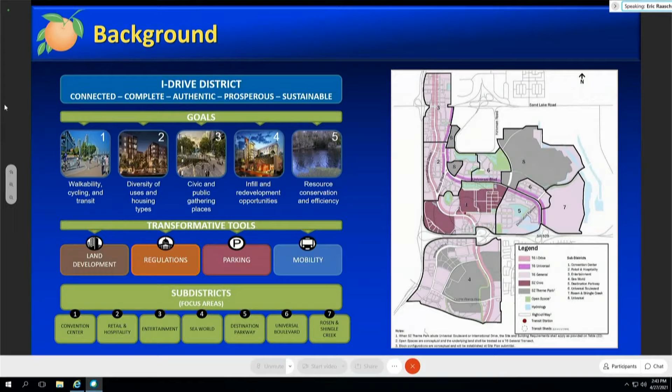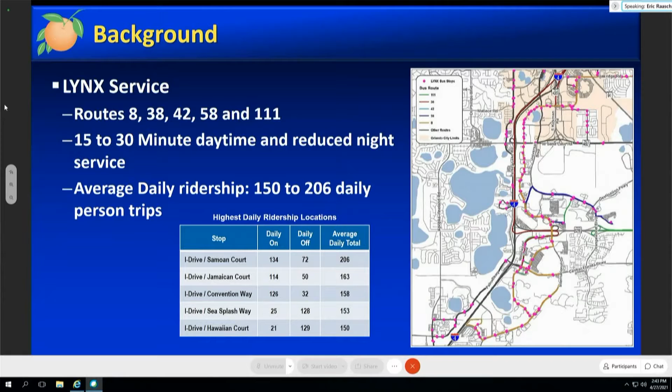There's a very strong linkage out in the Idrive district between land use and transportation, and you can see by the map LYNX serves a number of stops along Idrive, Universal Boulevard, and other road corridors, providing service to those land uses. There's 15 to 30-minute headways and fairly decent ridership.

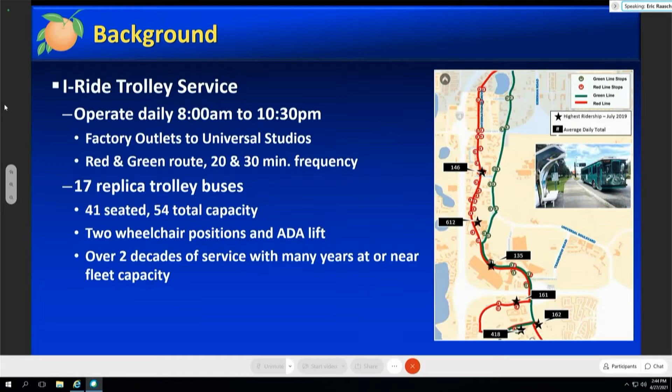Also in the district is the I-Ride Trolley service. It's had over two decades of service, and many of those years they were at or near capacity. The service runs 20, 30-minute headways for a good portion of the day and evening.

We also wanted to make sure that as we went through the study, we coordinated with the Convention Center Master Plan and made sure that their future projected circulators interfaced well with the system that we envisioned.

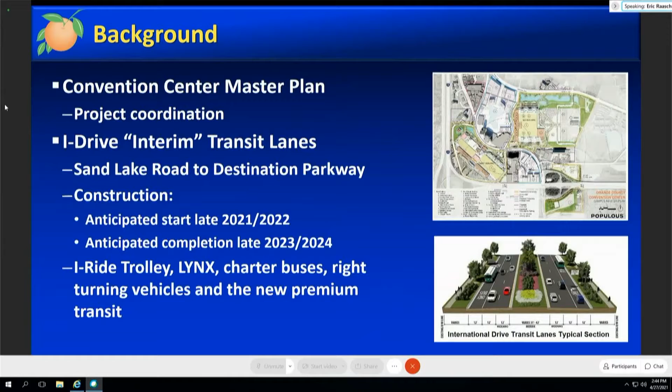Also an important project in the district is the Idrive Interim transit lanes. These are lanes that will be constructed later this year, and they're going to facilitate the I-Ride Trolley, LYNX, charter buses, right-turning vehicles, and premium transit service if we move forward with that.

This project also appears on Metro Plan's prioritized project list. You've also been briefed on the CRA project list recently—this project is on that. It's categorized as premium transit, and it provides higher comfort, capacity, speed, and frequency than typical bus operations.

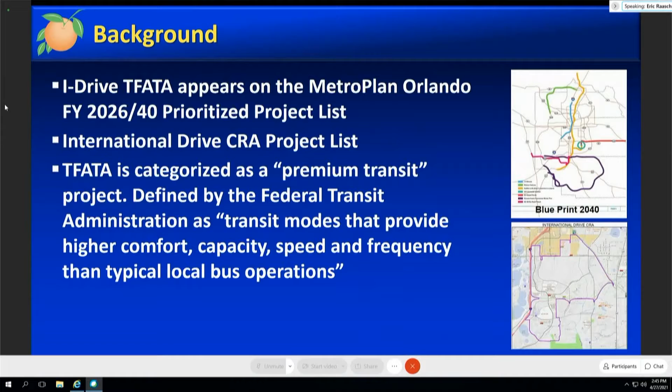Transportation planning has brought many road widening studies to this board, focused on roadway design criteria primarily aimed at creating additional space in the right-of-way for capacity, where we looked at alternatives analysis and access management, created a typical section, and attached costs to it.

Conversely, when we're talking about transit studies, that evaluation of alternative analysis focuses on operation plans for transit vehicles and creates a program for the projected ridership, attaching costs for O&M and capital. In this case, federal and state funding come into play because there are programs available to help with these types of projects.

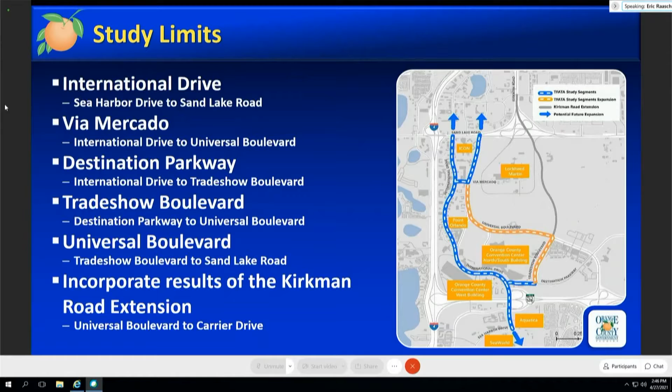In terms of the analysis that we conducted, these are the roadways that we evaluated for premium transit service.

In any case, the recommendations would support multimodal connectivity, make sure that we're serving all of the travel markets in that district, as well as create a sustainable and competitive system to make sure that we're competing with the rest of the globe in a cost-effective manner.

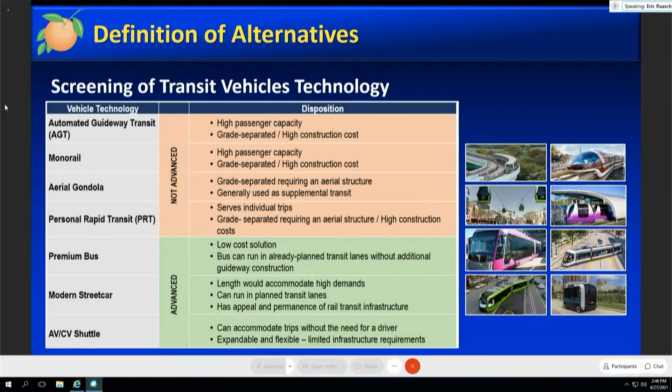As we dove into the various modes of technology for vehicles, we looked at a wide variety. Some advanced for particular criteria reasons, and others did not. For those that did advance, there was a high focus on passenger capacity, flexibility, and whether they were proven modes of transportation established around the country.

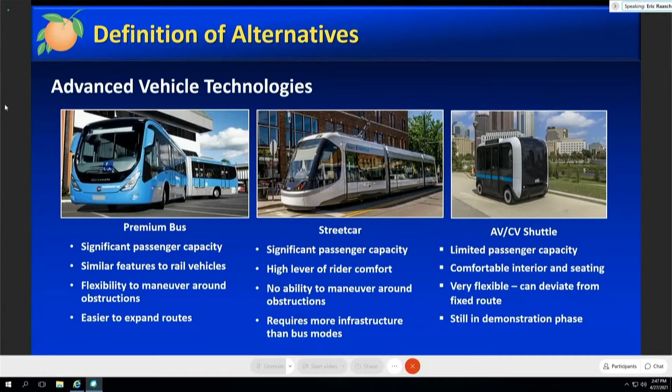As you can see, premium bus, streetcar, and automated and connected vehicle shuttles were the three that came forward. As we put them through the evaluation criteria, the premium bus came forward with lower capital costs, high capacity, higher flexibility, and of course a proven track record.

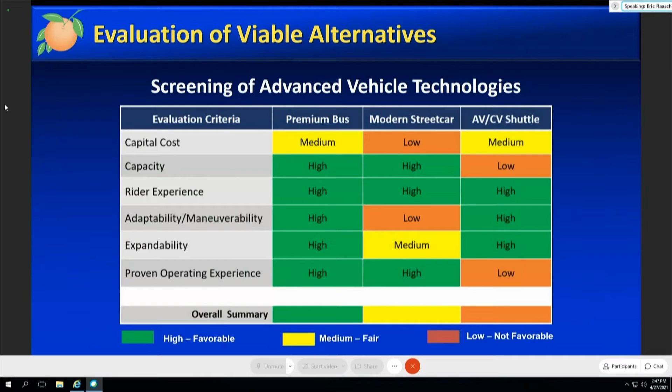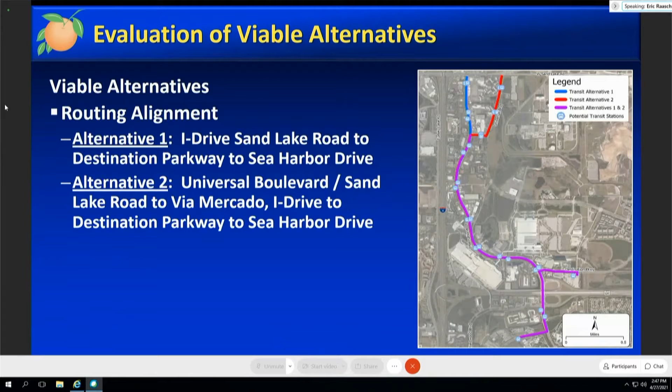We also looked at a number of alternative alignments for the system. Basically, we're looking from SeaWorld to the south all the way up to Sand Lake Road as a starter corridor for premium transit. The alternatives were up on the very north end between Universal Boulevard and International Drive itself. This system needed to be evaluated for whether it's going to be curbside running or median running, and based on a number of key factors, we evaluated that as well.

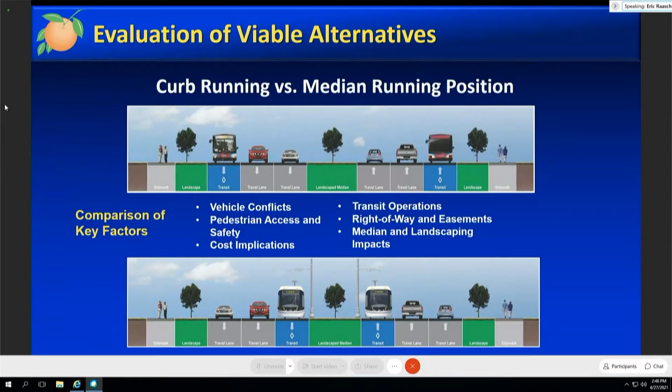In terms of the recommendations, the premium bus came in first. The alignment to stay on International Drive was heavily driven by the availability of parking at the north end.

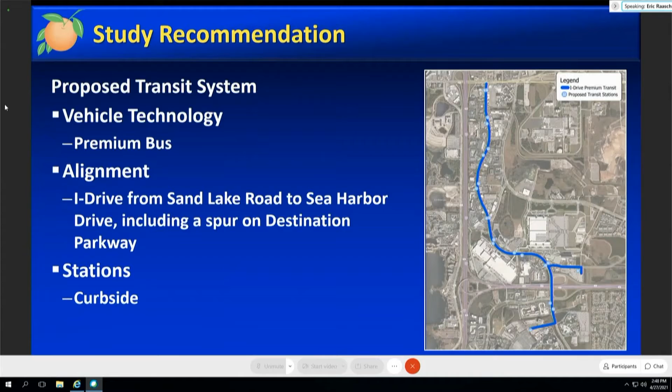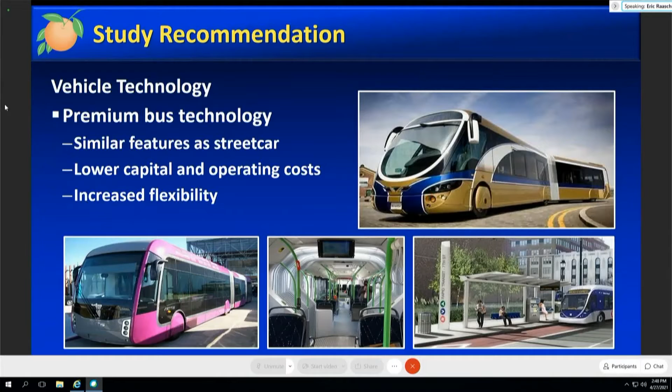The route goes from SeaWorld on Sea Harbor all the way up to Sand Lake Road, and that's going to be a curbside running system. Much of the technology for premium bus is very similar to streetcars, with all the amenities available, and it offered lower capital costs and greater flexibility.

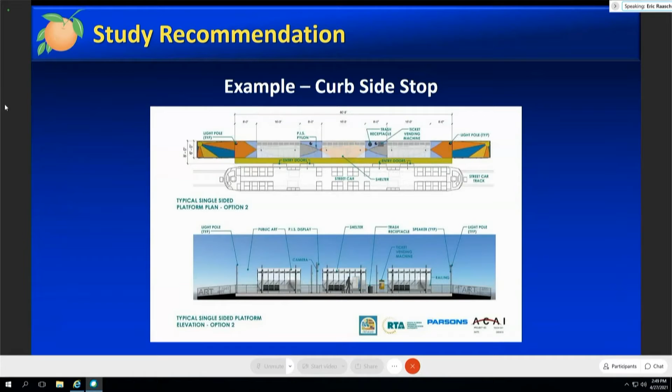We also had to look at the type of stations we were going to provide for this system. Seeing that a premium bus with an articulated feature needed a pretty good size station that offered level boarding, so that whether you're traveling with a stroller, a wheelchair, or a bicycle, you could easily get on and off that system. We also made sure the stops were spaced appropriately to facilitate a 10-minute headway, spaced approximately a quarter mile apart, so you're no more than 700 feet from the next stop.

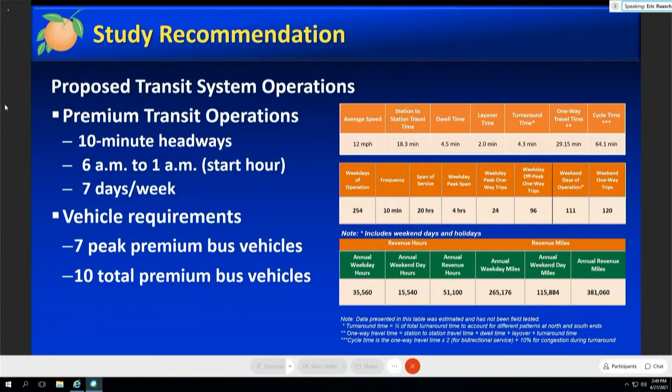With a 10-minute headway, if you just missed that bus, there'll be another one right behind it. We built an operating plan based on those ideas: a 10-minute headway, with expanded service all the way to 1 in the morning, 7 days a week. We built a fleet of vehicles to service that target headway, as well as a few vehicles for maintenance.

For capital and operating costs, we estimated that the starter capital cost would be $83 million. $23 million of that cost is for the transit lanes that are going to start construction later this year. When you look at operations and maintenance estimates, this system is estimated at $4.8 million annually. When you take the estimated ridership and the fare we anticipate, you're down to $3.4 million per year.

Transit hubs are important as well. They offer relief for the drivers of the system, and they also provide regional connectivity to future systems that may come to the corridor. We looked at a number of locations. Orange County already owns and maintains the #1 location, which is also the site for the LYNX SuperStop.

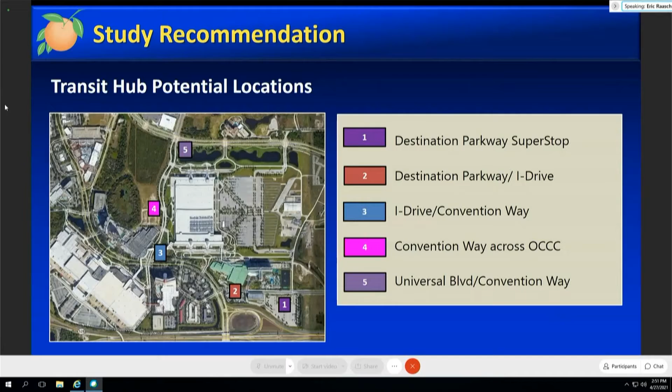In terms of funding, as I mentioned before, state and federal funding is available under a number of programs. It's a competitive program we'd be looking at to help finance this project. We're looking at a very conservative approach where we would be seeking a 50% split between local funds, likely CRA funds, and 50% federal and state funding.

Public involvement was very important, so we created an advisory group. Many of the members of that group are owners of attractions and facilities along that corridor and in the district. We held 4 meetings throughout the life of the project at particular times. We also had coordination meetings with state and local agencies, held small group meetings with many advisory group members to focus on their interests, and held 2 community meetings out in the public.

In terms of next steps, we'll be scheduling a hearing with you next, probably in the May-June timeframe. We'll want to recommend an implementation strategy, continue our coordination with LYNX, and potentially form a memorandum of understanding for the eventual operation of this system.

We want to stay in contact and coordination with the I-Drive District for the I-Ride Trolley, and keep up with any changes that happen with the transit lane project. We will be looking to make the federal and state applications for funding, and identify those local funds, as well as the needed changes at MetroPlan's TIP and FDOT's 5-year program.

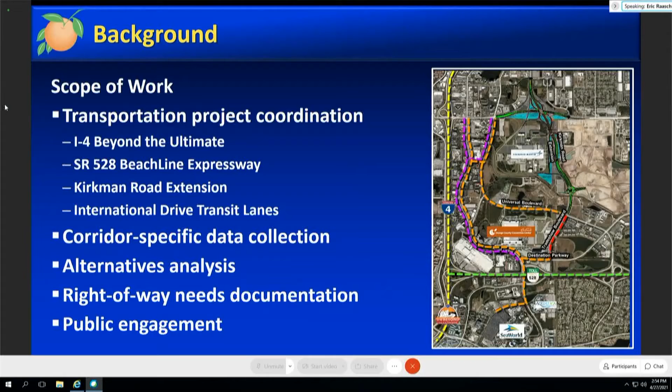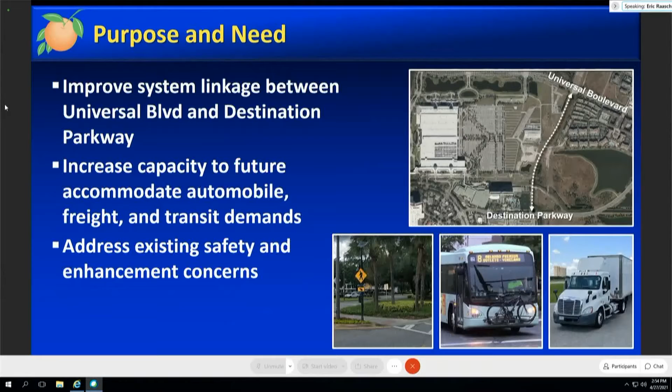We looked at those alternatives and documented right-of-way needs. During the same public involvement opportunities we had with the transit project, we used that time for this project as well. The distinct linkage between Destination Parkway and Universal Boulevard is very strong, and we wanted to increase the capacity for automobiles, freight, and transit demands.

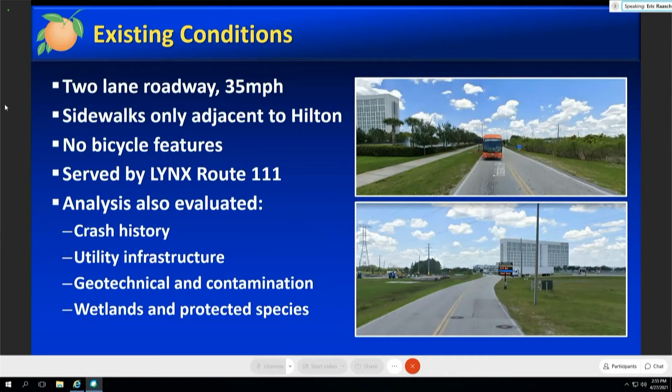Today, Tradeshow Boulevard is a 2-lane, low-speed, 35-mile-an-hour roadway with limited pedestrian and bicycle facilities. There is a transit route that runs along that roadway. We also looked at the crash history and all the infrastructure needed in order to consider widening that facility.

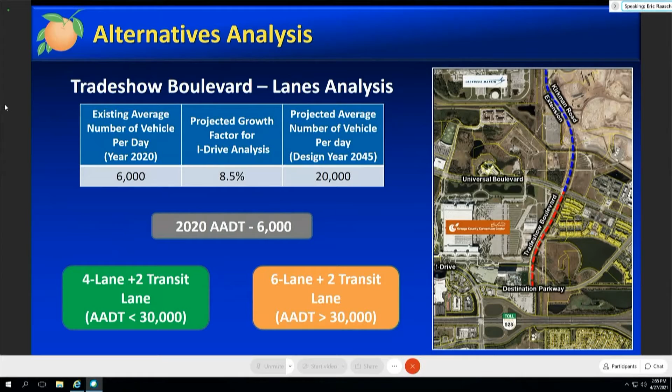When we looked at the traffic generation to the future, the roadway is not going to be suitable. It will need a 4-lane capacity. We did look at a 6-lane, but we just never reached the projections for that.

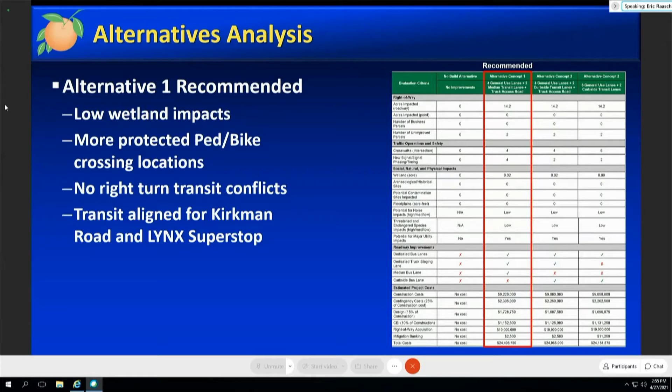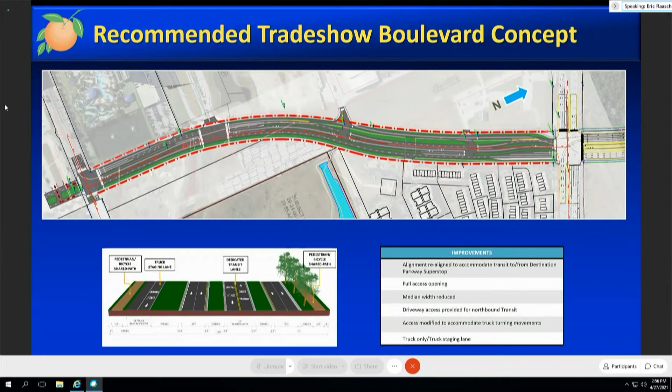As I mentioned, the public involvement included a variety of ways that we reached out to the public. And in summary, the Trade Show Boulevard RCA establishes the purpose and need to expand that roadway for the future.

Thank you. I was going to say that type of sustainable technology really is an economic driver. Companies that want to move here want to see that type of environment to bring their families, their young families to, and their growing industries to. So if we're looking at the foundational economic drivers, it falls in line with that also.

I really quickly, if we could go back to the map that has the lanes on the intersection - I think it was like the third to last slide. Yeah, close to the end. That one. Down one. Okay, yeah, that one. If we could make that a little bigger. Are those - is that 1, 2, 3, 4, 5, 6, 7, 8, 9 lanes across? That's right. Let's see, 2, 4, 6, 8 lanes.

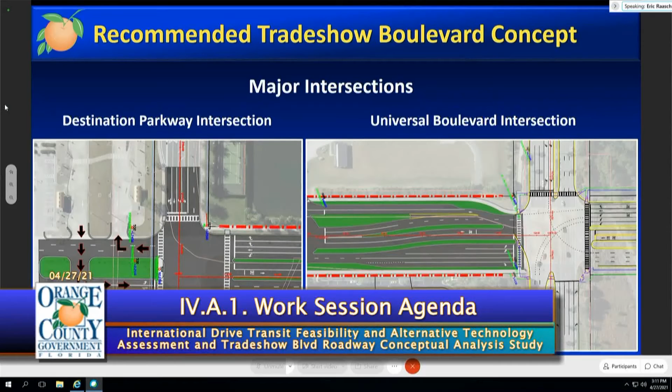Commissioner, this is Renzo. If I could just add to that. So the cross-section on Trade Show matches up with the cross-section on Kirkman Road. Oh, I've seen the Kirkman Road disasters. People hit every weekend on Kirkman, so I don't know if that's the model we want to use.

This is Kirkman Road extension, and the real point that I want to make is that both on Kirkman and Trade Show, these are transit type of facilities. So ideally, you would have folks riding the bus down Kirkman Road onto Trade Show. There are no stops on Trade Show, and the only stop north off of Kirkman is by the future universal development.

So my point here is that we're encouraging people to ride the bus and avoid crossing large intersections like this.

I understand that if this is necessary, maybe take the crosswalk out and just call it what it is. There's a crosswalk there, which indicates that we've established it as a pedestrian crossing. But if that's not an actual possibility for someone safely, I'm not comfortable with the idea that we'll wait and see if there's a pedestrian incident.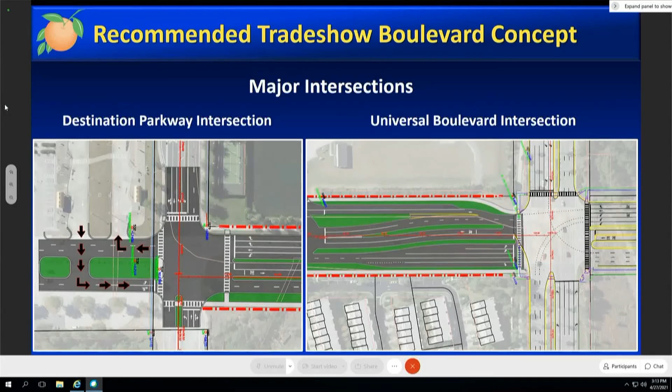Well, Commissioner, I understand what you're saying here. I don't know that we can resolve it today. This is just an information item, but it is something that we're going to have to certainly be aware of in that entire International Drive corridor. Pedestrian safety has been a bit of a challenge, and it remains.

We have a number of initiatives with the Best Foot Forward initiative and some other things, and we have been really improving the pedestrian safety in the area. So we have to anticipate the need, and what we're going to do if that's going to be a pedestrian bridge or any of that at certain locations in order for them to safely cross.

This is something that our traffic engineers are going to have to wrestle with going forward. And I know that the board will want to see certain options there that will keep everybody safe. So the point is well made. Any other comments, commissioners, staff, Renzo, Ryan, any other comments on this item?

Yes, Mayor, really reemphasize your point that obviously pedestrian issues are of paramount importance to us and the safety for pedestrians. Not to get too much into the weeds at this point of the study, but we have provided some fixes to those issues, like prohibiting any right turns at all four corners to allow pedestrians to cross the road. So those are some of the immediate things we're doing. This project is several years out, and by then we will continue to explore design factors that will continue to emphasize pedestrian safety and accommodate pedestrians on our roadways.